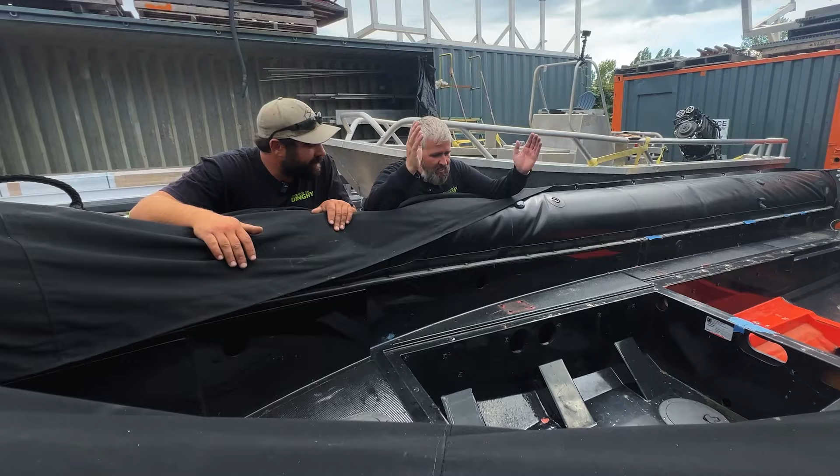So here's the plan today. We're gonna take that plastic tank, that's gonna go in the front of the boat. And then where that orange is, that's where our new aluminum welded tank is gonna go in. So we're gonna get them in place and get ready to plumb. Right on, let's do it.

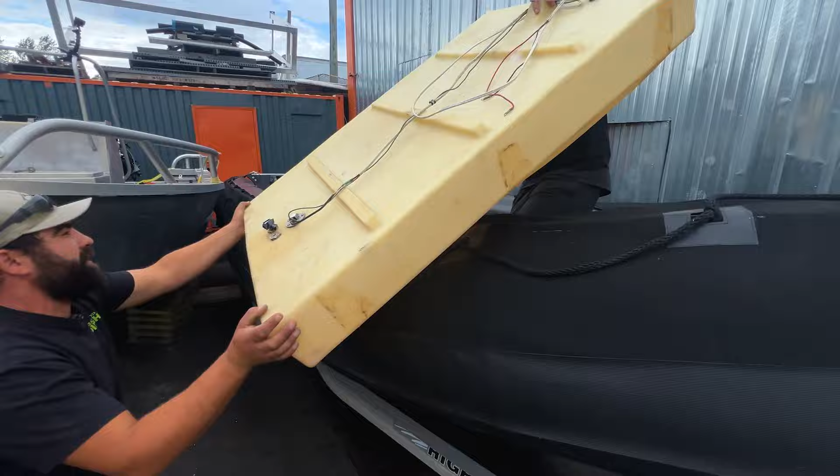Like I said, Tory's timing was perfect. This was also a great time to try out the new tank cam.

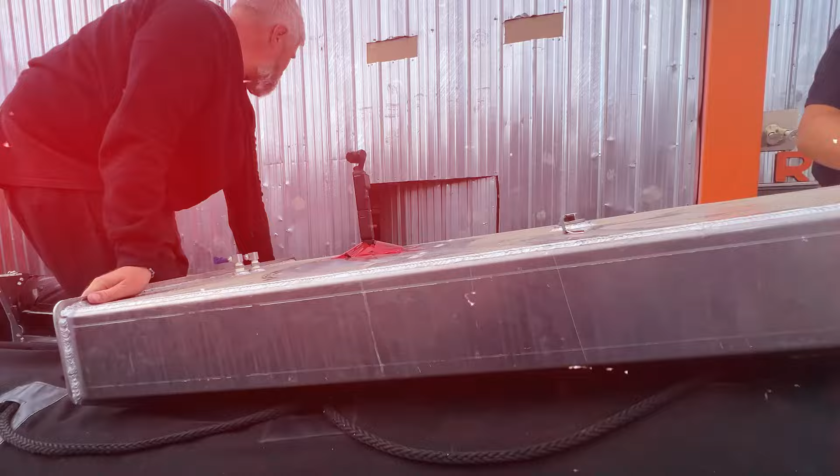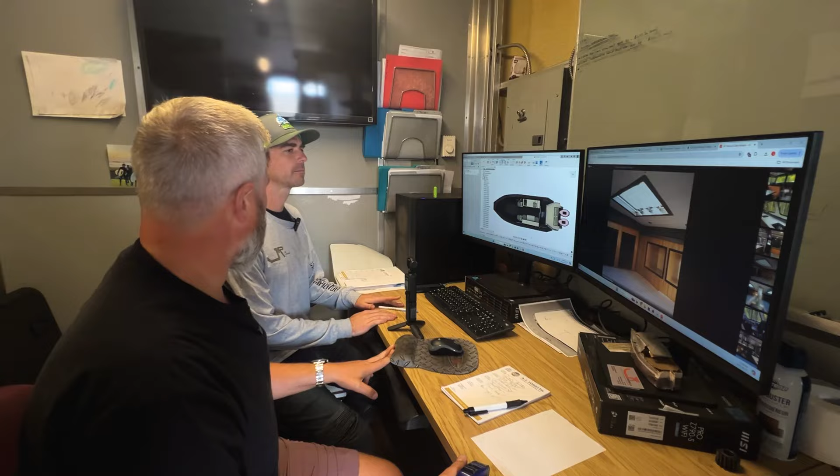While Tory and I were getting the fuel tanks into the boat, I thought of a better use of the interior space. This will involve a rework of the mid-cabin seating. It also involves some quality Sam time. So the next morning, I met with Sam to go over some of my new design suggestions.

I am back here today with Sam at JR Marine, and today we're gonna be working on the interior. So we have the kitchen to sort out, the back bench bed area to sort out, we have the seat boxes, the V-berth, and a ton of other things.

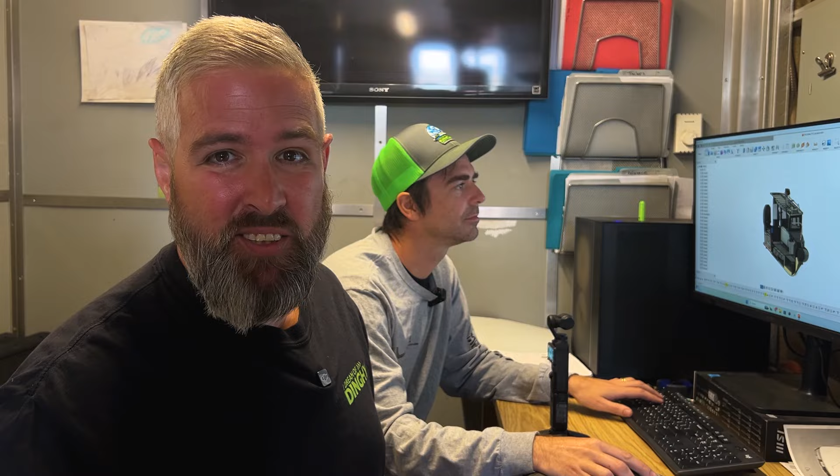So check this out. I wanted the interior space to be as open and multi-purpose as possible, but it still had to allow for the necessary galley and sleeping requirements.

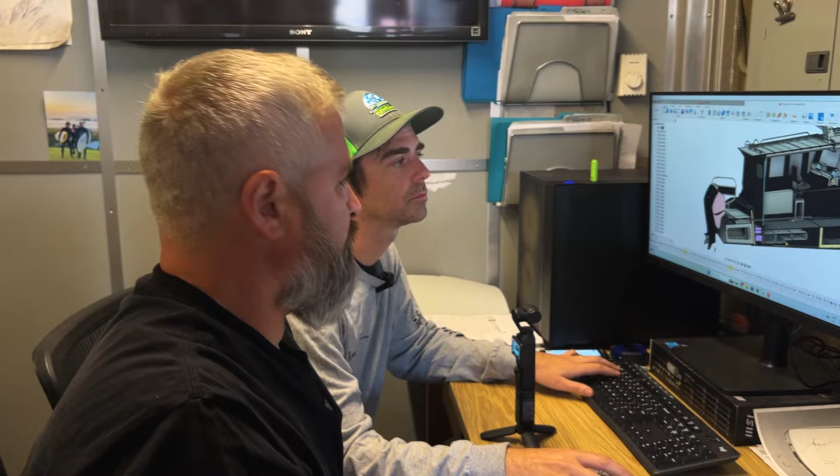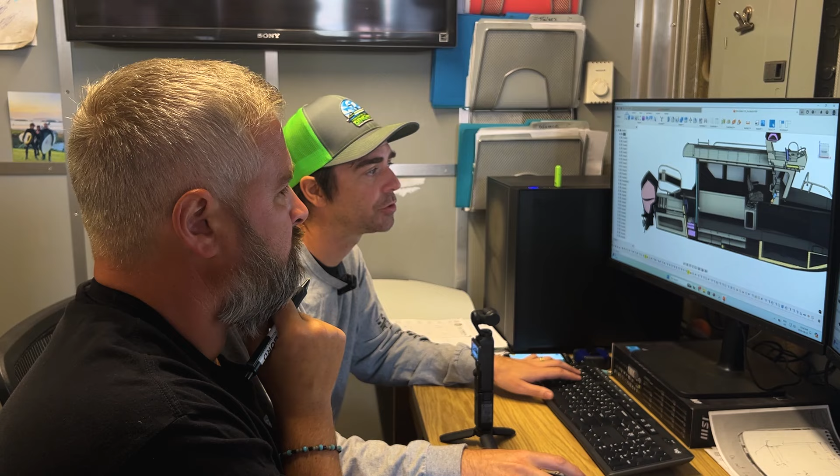What if we made a change to make things a bit more simple? We're trying to figure out how to simplify things. What if we turf that? We can even go back to kind of that original static. It was just a bench with kind of an angle out here leading in.

So in the boat so far, we have a back bench seat that is going to be a spare bed, and then we have the V-berth with 2 beds. We're just deciding on making some changes to the back bed so that it's not so congested inside the boat.

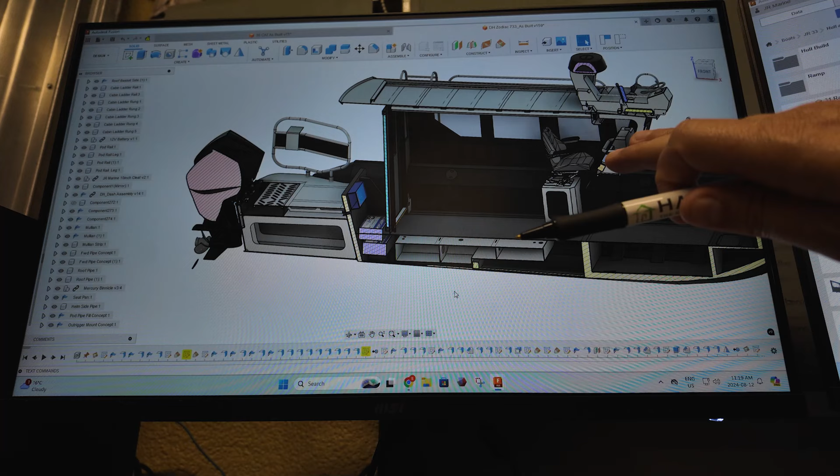What if we were to say, okay, let's simplify this. Originally I was saying, okay, when the bed's up, we could have storage in the top. What if we just went almost straight up for storage? And then put a couple fold down things to keep the whole boat open. You could do kind of like a double fold down bench seat right here.

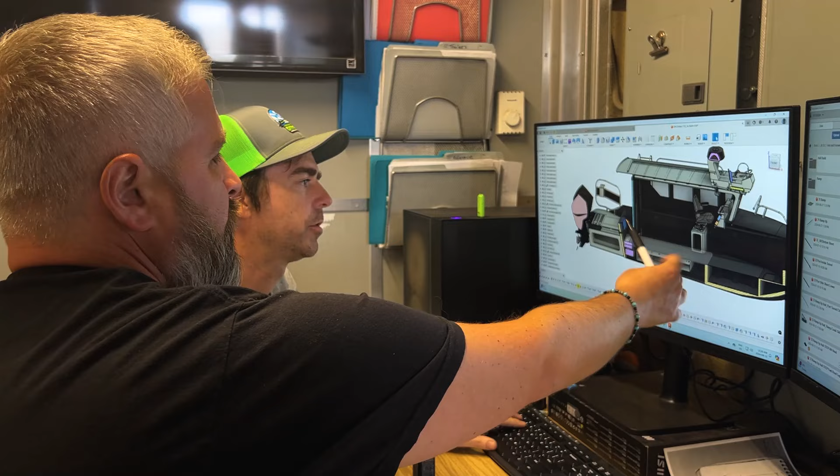Is there enough to do a fold down seat, and have my cooler in the middle? And then do you like the idea of storage up here?

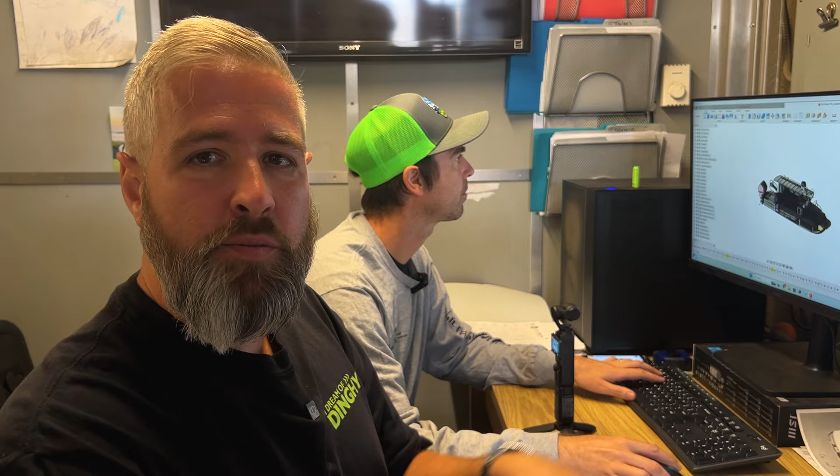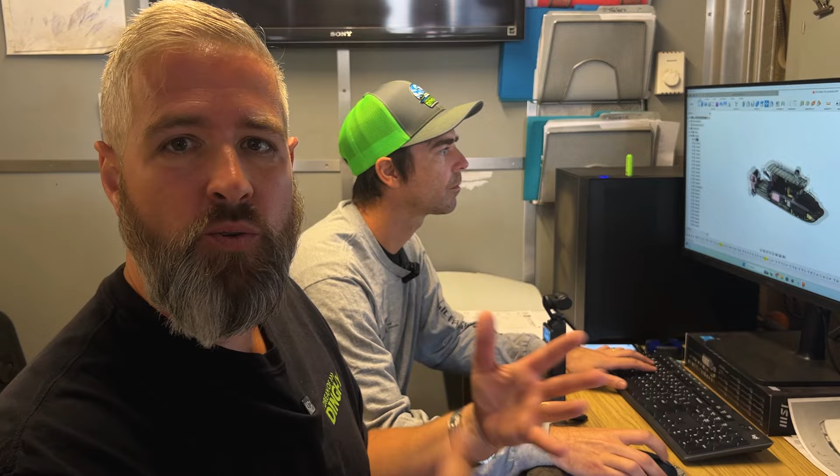We're kind of thinking that we might want some open space in the boat. It might be nicer to have more space. So maybe we have 2 fold down seats. And if we want to use it as a third spare bed, we have a blow up mattress or something that just gets laid out in the middle of the floor. What do you guys think?

I was initially thinking that a longer bench seat might be more useful, but after Sam and I went through the design, we settled on a pair of fold-away jump seats.

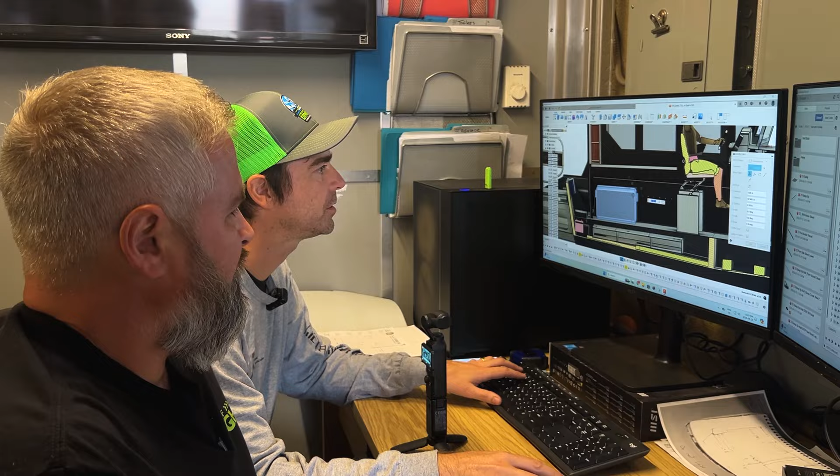These seats would be designed to accommodate my large Dometic cooler. It will slide between the seats and also serve as a tabletop.

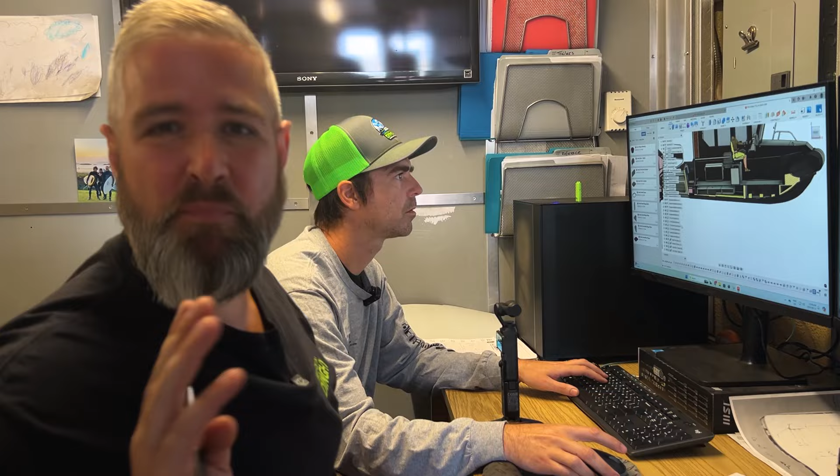I knew we'd be tight on space on the port side wall, so every inch counts. At the back of the new Ranger 22 that the guys just built here at JR, they had this really awesome low profile fold down seat. As soon as I saw that, I was thinking maybe that's something we want inside to conserve space. So we're just kind of placing them in here to see how they fit.

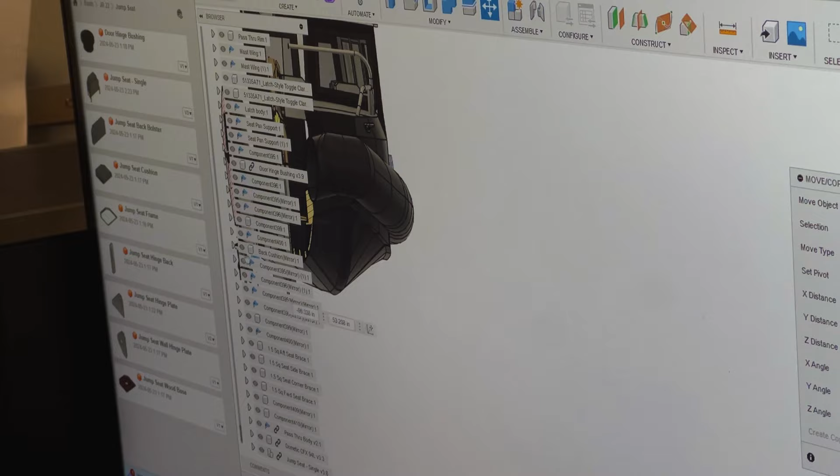Once we decided on the width of each seat, Sam entered the measurements into his design software. We also entered the overall width of the cooler. This was going to be really close.

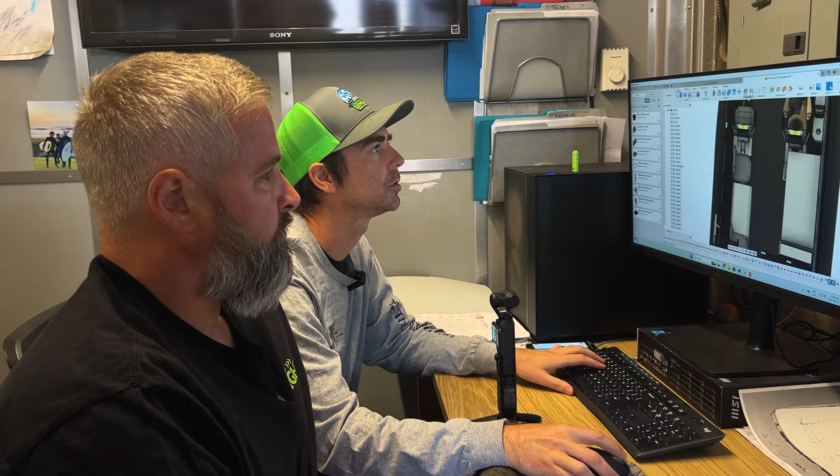As it turns out, as long as we're able to remove the handles on the cooler, it should fit, just barely.

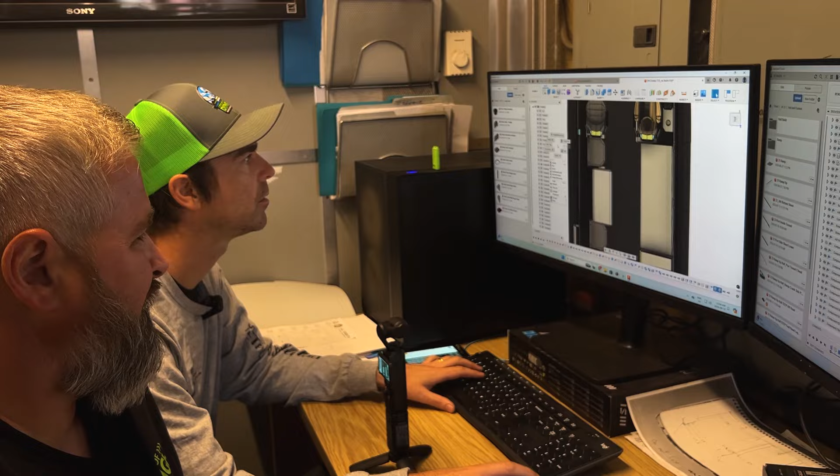We definitely want to make sure that we can get 3 people sleeping comfortably on the boat. So we're just going to check the width between the cooler and the actual kitchen area on the other side, just to make sure.

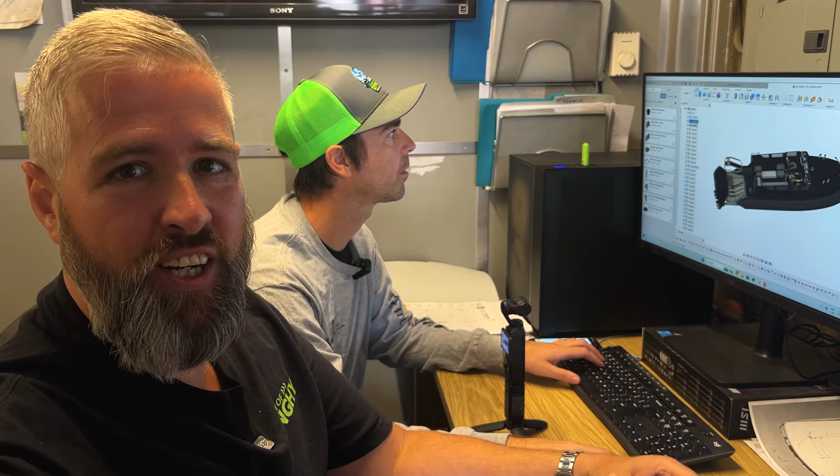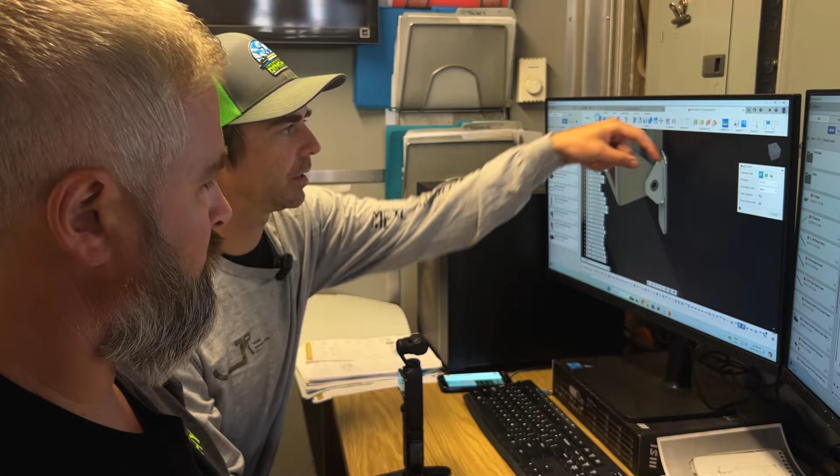Storage on any boat is always a major concern.

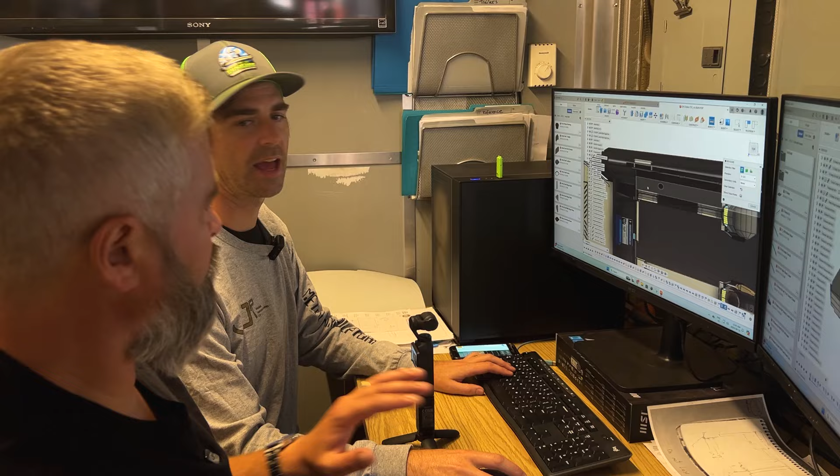I think we've made the decision on the back seating. So we're gonna have the cooler in the middle, 2 fold down seats with storage behind it. So that's 1 check off the list.

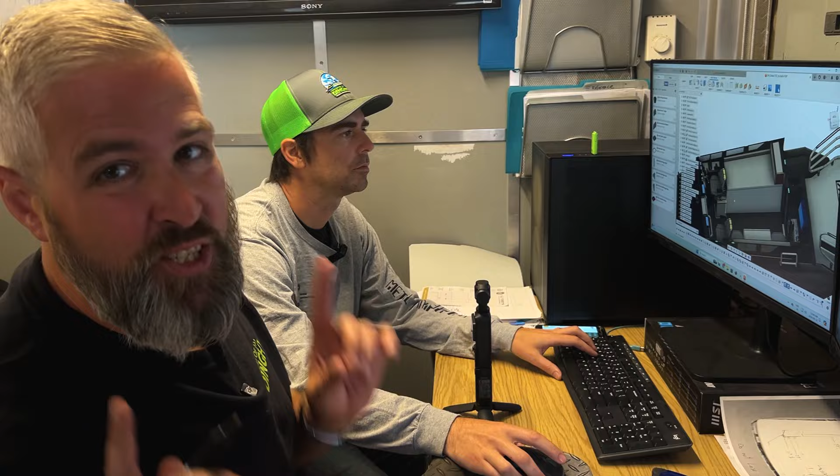So we're gonna go over to the starboard side and start figuring out the details on our new galley. What we're thinking is we're gonna be basically setting up a piece on the deck and the top back, and the kitchen area will be removable. So we're gonna finish the inside, do all of our plumbing, and then be able to put that into the boat at that point.

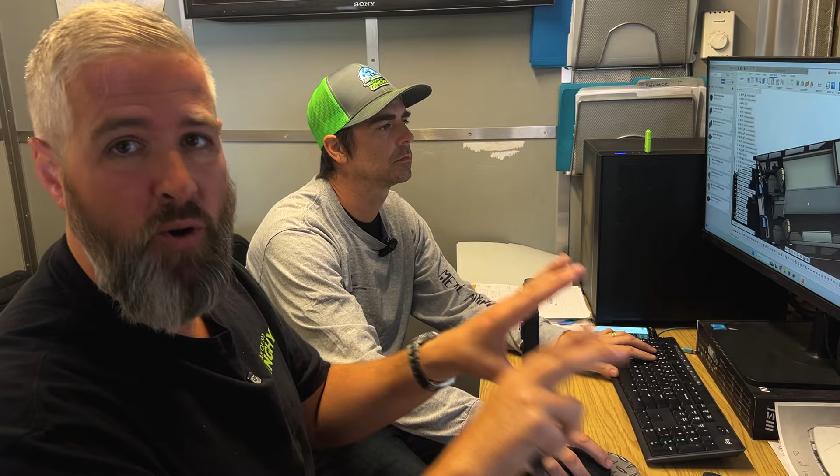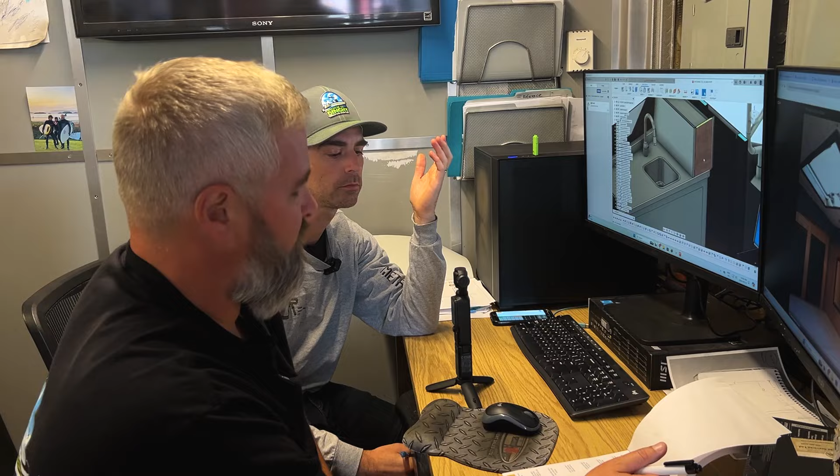So what we're thinking here is, I know I want a stovetop in the boat and a little sink for doing dishes. We've got pretty much a full counter. We have 5.5 feet, and then we have full width. So we're getting up to 25 inches deep. So we're gonna be able to fit a sink and a stovetop.

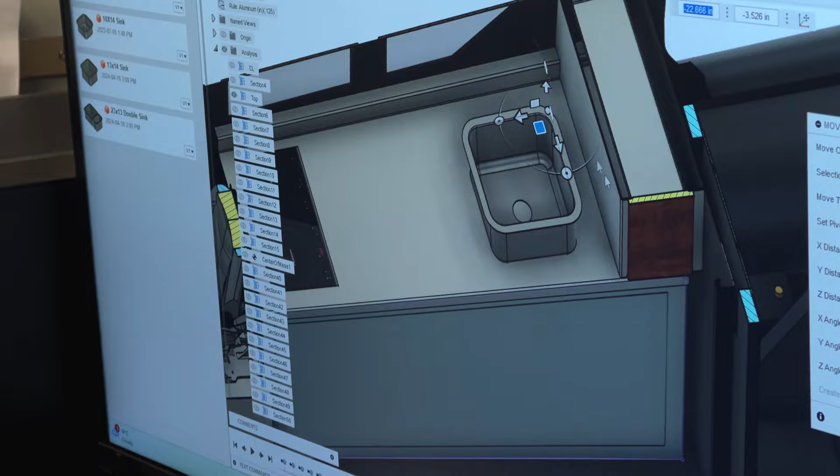It's gonna be awesome. We weren't looking for anything too fancy, it just had to be practical. In many ways, the simpler the better. No clutter and easy to keep clean.

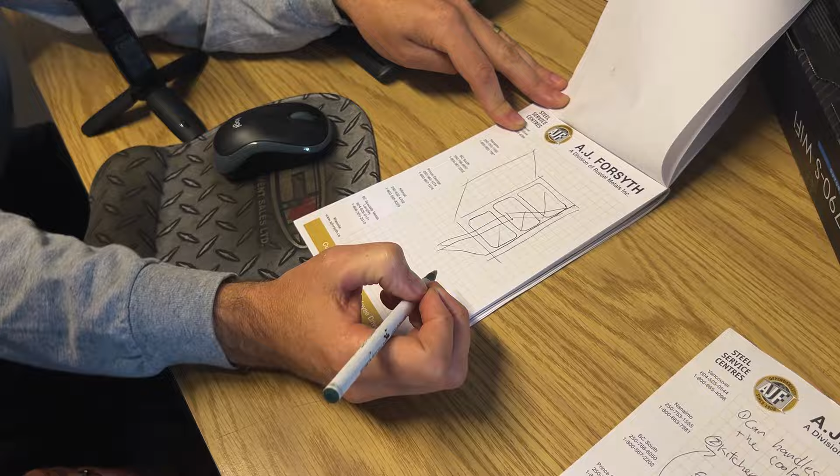So we have an issue because we need to make sure that there's enough space to get in the seats. So we're just gonna head to the boat and check it out. Come on, Sam, let's go.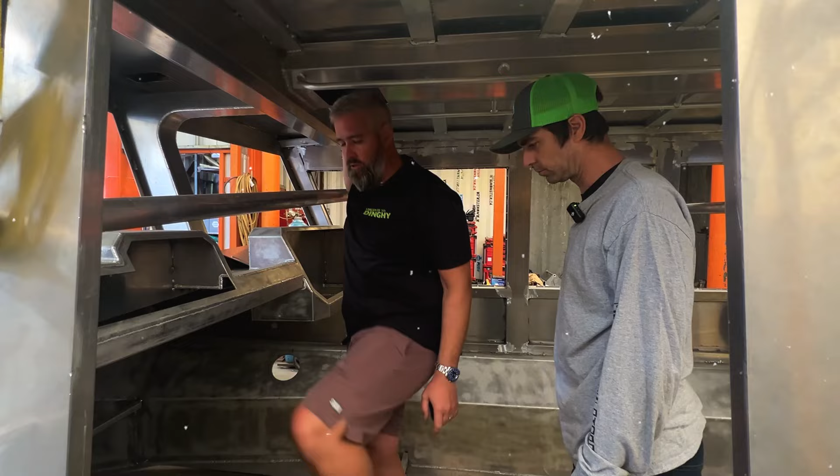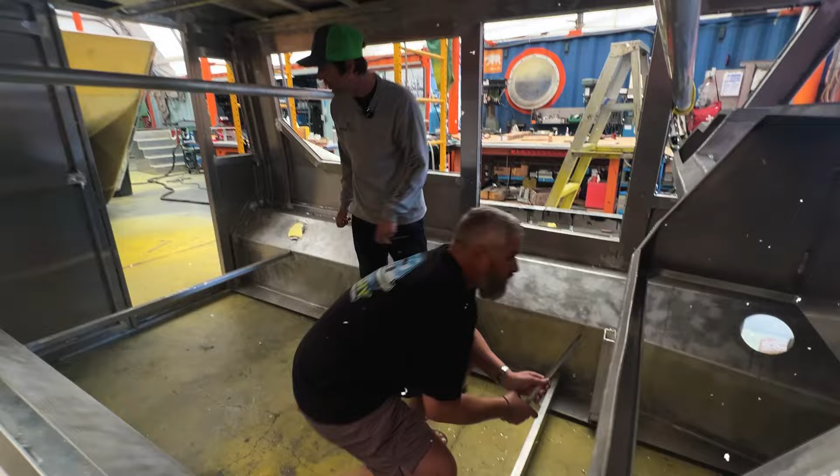Sam and I popped over to the shop to double check some measurements. One thing led to another, and we soon found ourselves revisiting the sleeping arrangements.

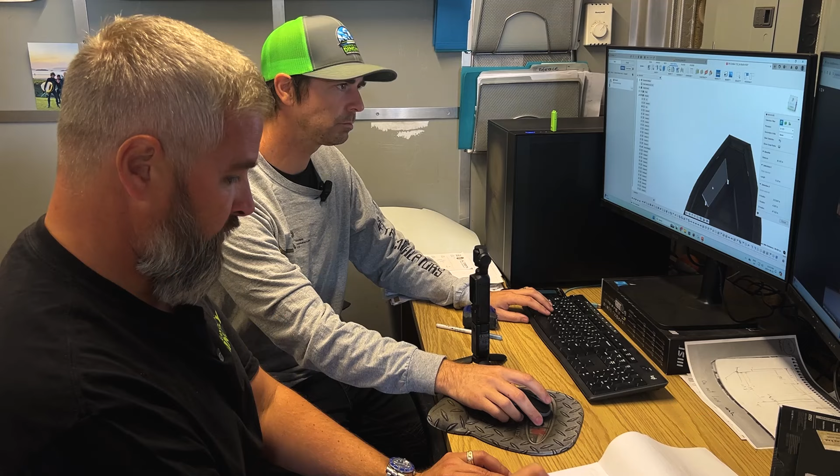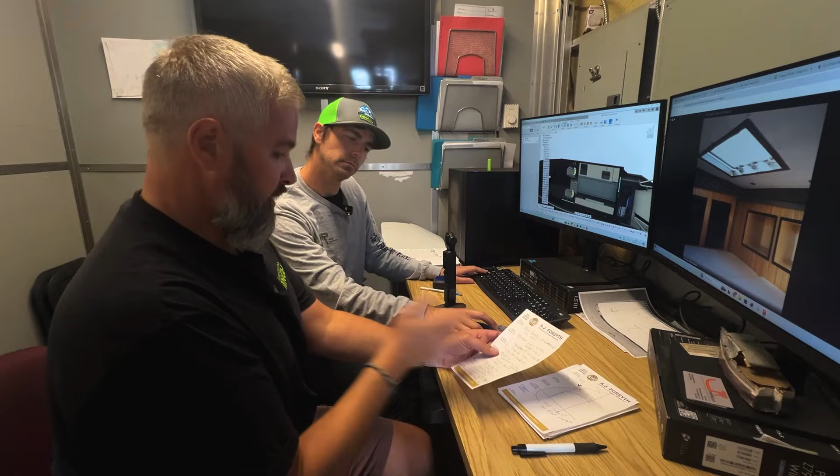They say the devil's in the details. That is certainly true in this case. But I am thrilled with the revised interior layout. Sam has done an amazing job, and I'm really looking forward to this phase of the project.